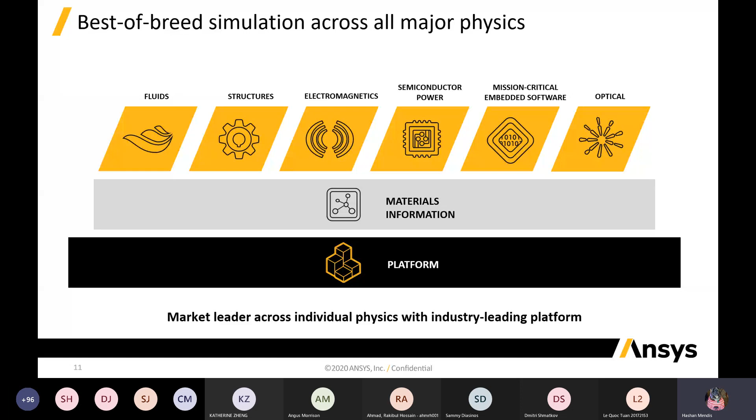One of the reasons we've partnered with Ansys is because of the breadth of what they've actually got. So they've got a full platform based on materials information, fluid structures, and electromagnetics as well. There's a lot to do with Ansys. We even do things like optical. We're not going to go into that much detail in this particular training, but if it is something that you're really interested in, please do let us know. Like if you've got a project, I can always get you in touch with the people that can really help you out, or we can actually get in touch with the Ansys team directly and get them to help you out.

So what are we really trying to do here as well? Now, as well as a platform, but as well as your kind of career as an engineer, at university, you've probably started off learning and understanding about single physics. So you guys have probably got CFD or FEA classes. What happens is that if you choose to go down this route, you will start to learn a little bit more. You'll start to combine the physics together. We can have tightly coupled or loosely coupled simulations, so multi-physics or multiple physics simulations.

What happens is that when we've got these components, we've got designs out there, and we're using these simulations, we've got CAD information as well. They start to form what's called this digital prototype. When we've actually got the full product made, we've got what's called a complete digital prototype. And what happens is that when it's actually out there on the field, we've got what's called a digital twin.

So we can actually start to take information from what's out there in the field, pair it back to the analysis and what we expect to happen, and get a deeper understanding about the actual product, what's happening with it at the moment, is it within the design capabilities, and what do we need to do going forward? Are there potential warranty problems, or can we make aftermarket accessories for it?

So the training we've got over the next couple of days - this first week is going to be focused on fluids, next week is going to be focused on FEA, and the week afterwards is going to be focused on electromagnetics. We've got 2-hour sessions broken out throughout the day. So what we'll try to do is go over the presentations as well as actually get some hands-on with the software. And then we've got some online training material as well.

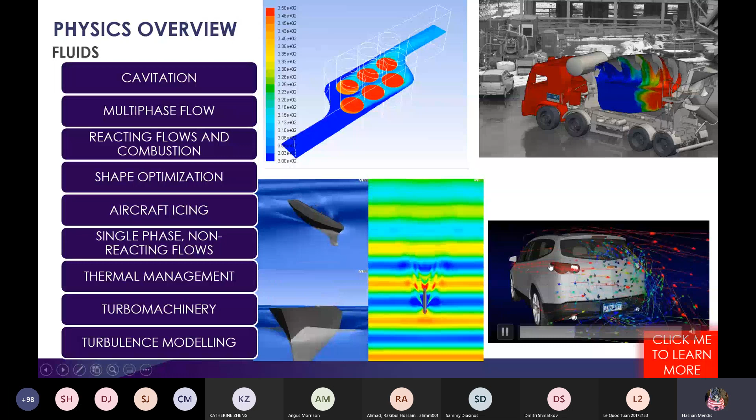On the bottom left, we've got water - so this is a volume of fluid. Again, we can analyze things like boats, and traditionally people are aware of external aerodynamics. So you can see on the bottom right, again, we've got a car, right?

We'll talk about in a little bit more detail some of the structural physics and the overview as well, right? So how it's used - if we've got explosions, if we've got crashes, you can see making these types of components and demolishing them again and again can obviously be very costly. So we can use simulation to really reduce the actual design impact.

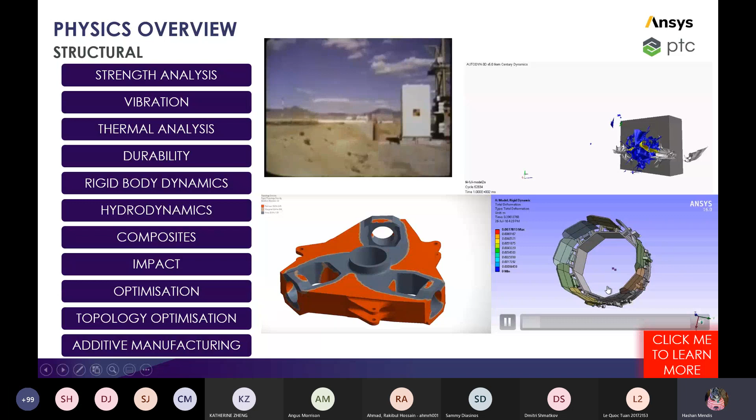Topology optimization and rigid body dynamics as well - again, all of these things are simulations that we can do within Ansys. And we've also got a suite of electromagnetic tools. I'm not going to go too deep into that, it's not really my expertise, but if you do have any questions or you want to incorporate some electromagnetics into your structures or your fluid simulations, have a chat with us afterwards.

Like we're talking about, we learn a lot about the simple single physics side of things, but when we start to get a little bit more advanced, we can actually start to pull a lot of these things together. So you can see this is a bit of a step-by-step about what we might want to do. This is a fluid-structural analysis.

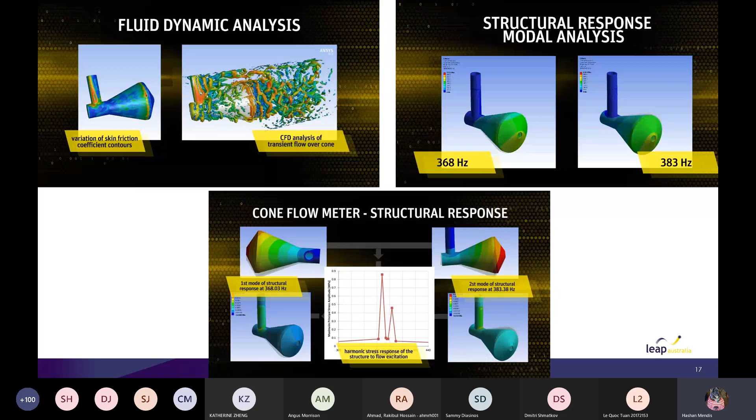So initially we've got some sort of fluids analysis, and it's giving us information about what's happening with the actual pressure on the surface. We can take those forces and do a structural analysis afterwards, right? Whether that's stress strain - in this particular case we're actually looking at the modes. We can then start to understand if there are any resonant frequencies, and have a look at what the potential stresses of the actual simulation might be.

We can start to ask ourselves, how long will this actually come into play? How long will this live? Are there any hotspots? And if we identify any of those, we can then start to make some changes as well with the actual design.

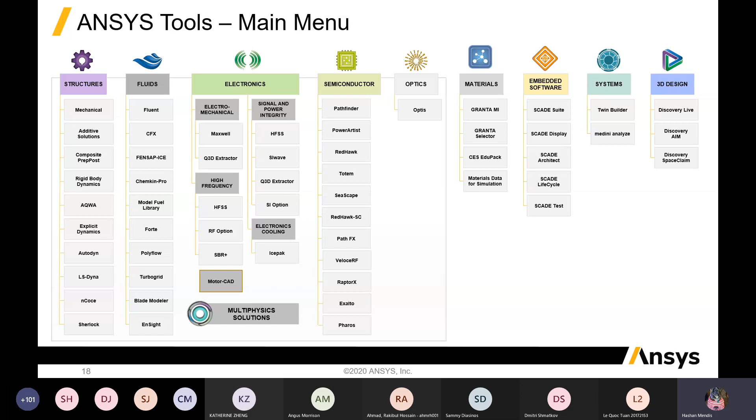All right, so again, there's a huge amount of tools that we've got underneath our actual belt, depending on what you want to do - it can get pretty intimidating. So we always encourage students to come talk to us early on in the design process, have a conversation with us. And if this is something that's part of your project, we can make sure you've got the correct material, you're on the right path, and the actual expectations are managed about what you can do in an appropriate amount of time with the resources that you've got.

Now, we've got a lot of resources to help out students. So we've got technical support. You can actually email us and we'll be able to help you out. Just give us a quick description, tell us a little bit about what's happening.

We've got YouTube channels as well. We've got a bunch of playlists on things like CFD for FSAE teams, FEA, information about AIM and Discovery Live, a bunch of different things. I personally find that's the greatest way for me to learn. Everyone's always a little bit different.

We've also got blogs as well. We've got a CFD blog, a bunch of posts and information out there. Some of these, by the way, things like turbulence modeling, I always go back to because sometimes I forget the difference between the different turbulence models that are out there and the various options. So having some of these bookmarked can be really good for your career, knowing you've got some resources you can go back to.

It could even be things like articles as well. If you're relatively new, maybe your university doesn't have these types of electives, or you haven't quite got to that yet, Ansys have their own learning forums. You can go through and learn a bunch of courses that'll help you out, giving you the backbone and physics behind it before doing the actual tutorials.

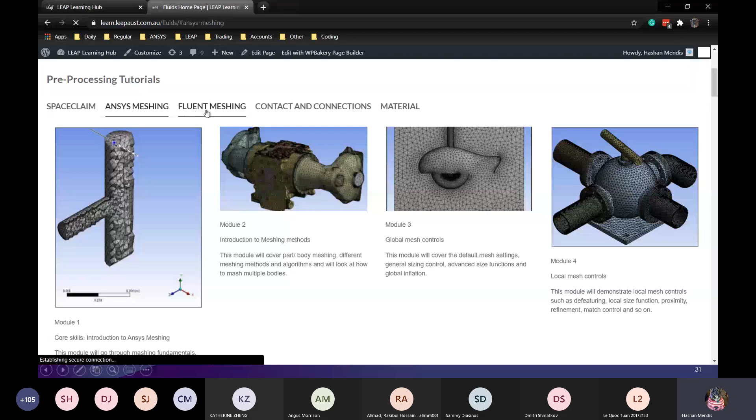So these are the SpaceClaim ones. We've also got things like Ansys or Fluent meshing, and if you're mechanical, we've got some materials and contact selection as well. If we scroll down a little bit, you'll start to see that we've got a lot of the different physics as well.

So if you've got a project where you need to look at multi-phase flow, it's best to have a look at these modules. They're not just tutorials, they're also lectures to give you a good understanding of the actual physics. And there's some optimization too. At the very bottom, we've actually got some getting started tutorials.

So we'll be using the fluids getting started, and we'll be using some of these modules. You can see it takes us through what we're going to be doing over the next week: a bit of geometry, a bit of meshing help, and then we're going to be getting into the physics. Some post-processing, we'll look at some best practices, turbulence modeling, heat transfer, and transient flow as well.

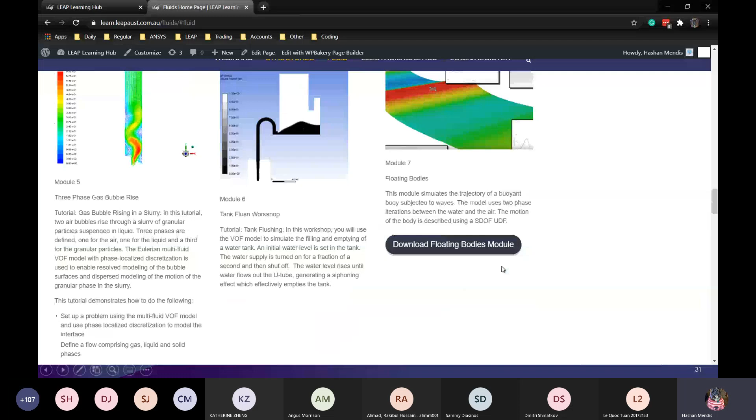And then afterwards, if you're interested in multi-phase, it's always good to do the getting started first, and then pop over to the actual multi-phase section and go through some of these materials depending on what your project is.

And then the other thing is the Ansys help. This is pretty much the help manual for Ansys. I use this on a daily basis. If I forget some of the theory or the user guide, or what's the best way to actually apply a specific model, I have a look at the help guide.

If you go to your start menu, you'll find Ansys Help 2020 R2 or whatever version you've got, and you'll be able to find the Fluent help and go through some of the material. A lot of what we're going to be talking about you can find in this material, and we actually get a lot of our material from the help guide as well.

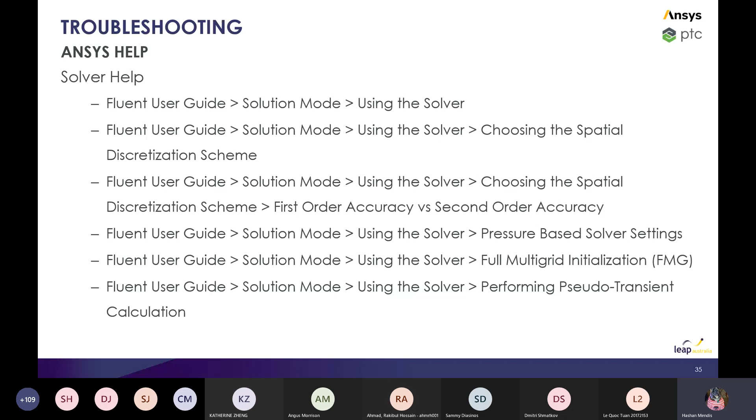Things like boundary conditions, turbulence modeling, you can find your way through to setting up different models and various things. I've found these personally very helpful, and I've got a lot of them saved as bookmarks, because you're not meant to memorize every single thing, but you should understand how to get to that information, including some advanced stuff as well.

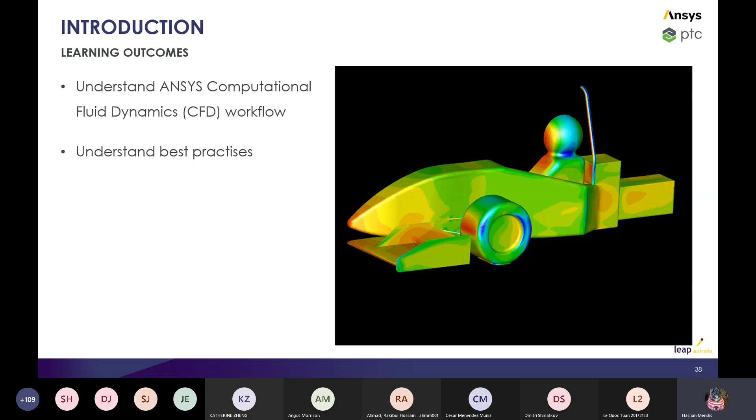If you've got supervisors as well and they want you to do some fluids work for your project, reach out to us with your supervisor and we can get on a call, a Teams call like this, and really help everyone out.

So when it comes to the actual equations, what are we fundamentally doing? We're solving some sort of fluid flow, right, while staying within the realms of physics. So we're solving the conservation of mass, energy, and Newton's second law.

The purpose of what we're trying to do is get a detailed analysis of the actual situation. Things like what the distribution of pressure is, velocity, if we've got multiple phases, like carbon monoxide in the air, what's the distribution of the phases. We can then start to understand a little bit more and get some analytical numbers about things like force, what's the lift and drag on these certain components, what's the ppm in my actual air volume.

It's used to predict the fluid flow. We've got heat and mass transfer, chemical reactions, and other related phenomena, and we can start to pair it together with other physics depending on what we're trying to do.

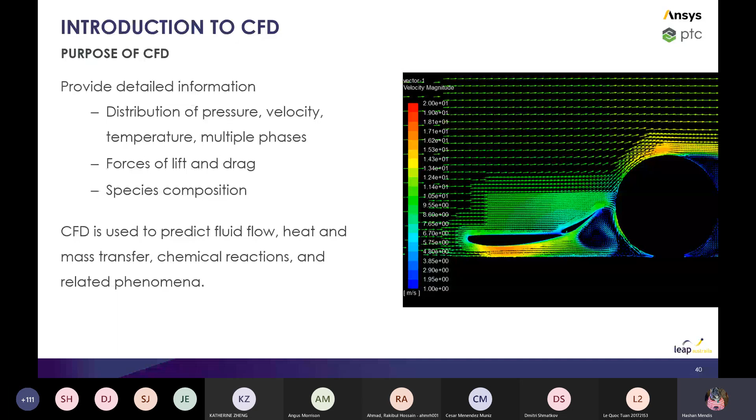It's used throughout the engineering process. I'm sure a lot of engineers at university have used it initially in the conceptual design phase, trying to understand what's happening there. But we use it after we've got a product, for detailed product development. We've got consultants that use it for troubleshooting.

So people often come to them and say, hey, this thing has failed. Can you use simulation to figure out what are the conditions that had to have happened or occurred for this thing to fail, and then make some recommendations about what we can do to really improve it. And then again, through there, we can optimize the actual design and redesign our components as well.

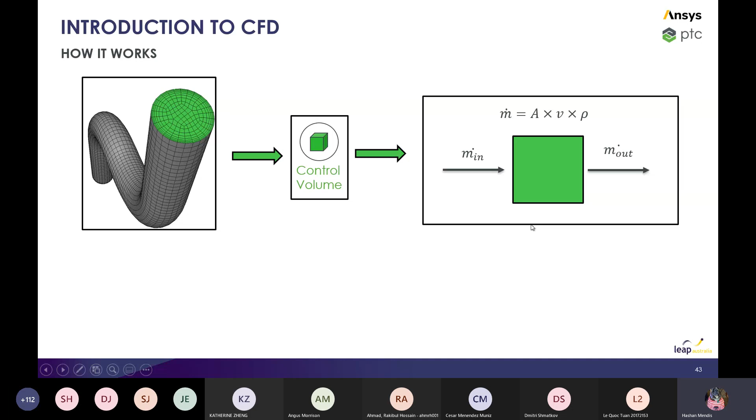This is what we try to do. We'll get a little bit deep into the mathematics. Fundamentally, if we take a step back, we've got some sort of geometry on the left-hand side. We're going to break it up into some control volumes, and then we're going to do some mathematics, making sure things like the mass flow in is equal to the mass flow out. Now, in reality, we're using what's called a Navier-Stokes equation.

So the equation can get pretty complicated, but it can be broken down into these types of terms. We've got some sort of transient term on the left-hand side, trying to capture the unsteady nature of the flow. We've got a convective term here capturing the bulk fluid motion of the actual flow. We've got a diffusive term here capturing the viscous flow, things like buoyancy effects. And on the right-hand side, we've got a generation term or a sink, so if we're creating or removing materials, we can use this term.

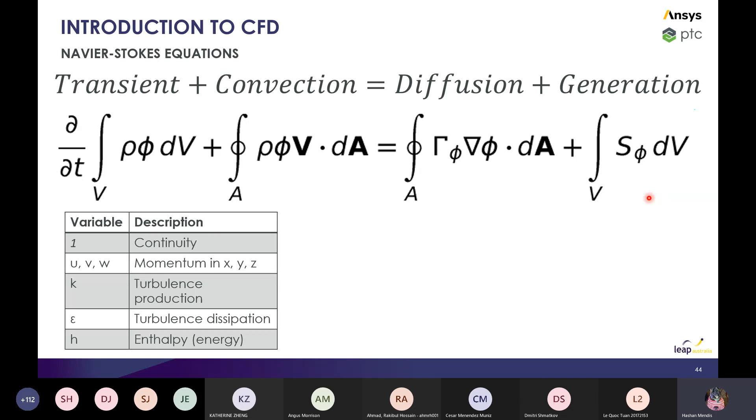What we're doing with this equation is that we can then start to substitute different variables depending on what actual flow physics we're trying to involve. And we can actually add equations as well, again depending on what our actual situation is.

Just walking through the modeling process, we often go around in cycles when it comes to this. We've got some sort of problem identification, so maybe your manager, your team leader, is giving you a problem. We need more downforce, right?

We then go through and try to pre-process our model, so we set it up for the solution, and we've got a couple of things that we can do there. We then start to solve it, and then have a look at our actual post-processing, so have a look at the pictures, the numbers, how does it relate back to our problem.

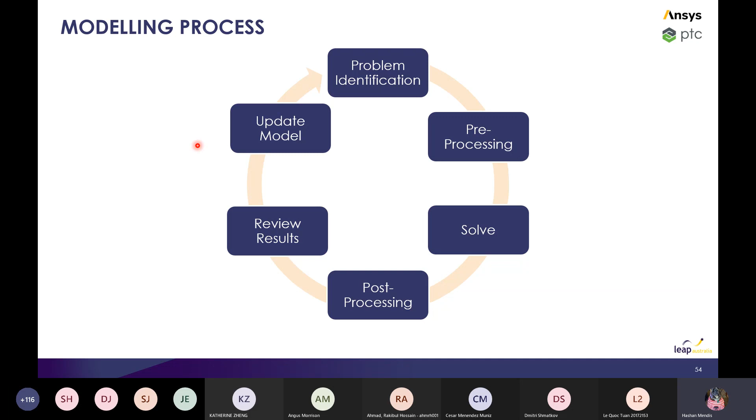And what are we trying to solve? We then start to review the results, and depending on that, we might then go back and update the actual model. Again, thinking back, are we solving the problem? Do we need to make some changes?

It's really important, especially with CFD, before you actually start to even open the software, to have a solid understanding about the actual project timeline. How long do you actually have to run your design and do CFD? How long do you have to actually learn about what you're trying to do as well? What's the current literature? What have people already done?

We don't want to be reinventing the wheel here. We want to be thinking about your constraints, right? So if I'm designing the front wing in this particular car, I know I've got the rules, and the rules say I have to be within XYZ dimensions, right?

Also thinking about what's your system constraints. What are you trying to do? You might be responsible for the front wing, but you'll realize straight away that the front wing affects things like your cooling and your rear wing as well. So then really understanding what's happening there.

How are you actually going to manufacture it? Last thing you want to do is make this awesome component that makes a huge amount of downforce, only to realize that you can't actually manufacture that. And you also want to be thinking about your testing constraints as well.

So CFD doesn't get rid of testing at all. It simply complements it. So at the end of the day, after we've run through these whole steps, we want to actually test to make sure what we've assumed and what we've kind of designed is what we actually see, on car, on track, or on our component.

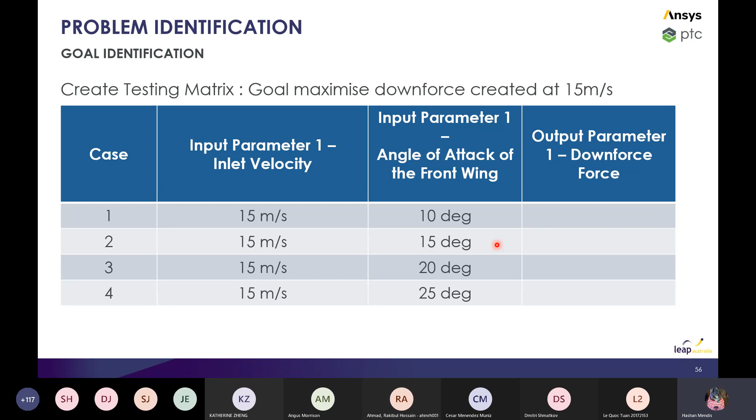So look, when it comes to geometry modeling, we'll talk a little bit about this, and then we'll actually open up the software and start to play around with it. The first question that we kind of need to ask ourselves is what geometry is actually relevant, right?

Do we have existing CAD? Is it manufacturing CAD? Do I need to get rid of and defeature components? Or do I need to create something new altogether, right? If I've got the interaction between the front wing and the wheel, what components do I need?

In this particular case as well, if the air is just going straight on, do I necessarily need the full car, right? I can almost chop half of it and then start to only focus on one half of the actual design. And then again, fully featured, right?

So if I'm focusing on the front wing, and the front wing and the wheel interaction is very important, but I may not necessarily need the side pod, the rear wing and the rear wheels as well. Right. So thinking about, how can I simplify my model and my geometry as much as I can?

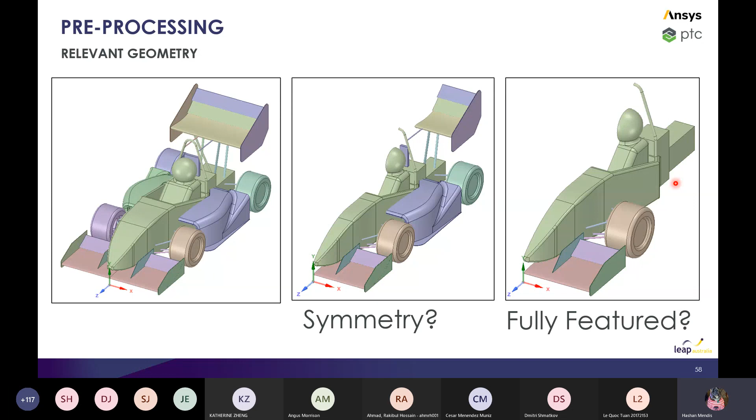By simplifying the process, it means we can also get more mesh elements in there. We can run more designs. At some point, you're going to need to understand what the interaction is between, say, the front wing and the cooling system. So then, only afterwards, say, would you start to introduce them and put some of them back in as well.

The next thing, we're going to be using SpaceClaim to actually prepare the geometry. So we've got some tools in here to remove things like missing faces, small faces, split edges, and extra edges. All of these things that we're trying to do is with the goal of creating a nice, clean geometry to create a high quality mesh.

It enables us to run our simulations with a lot more accuracy. And we won't have any problems as well. So we won't have any bad quality elements, again, which can influence the actual accuracy of the model. We've got some tools in here to start to remove faces and models, check for things like interference and small edges as well.

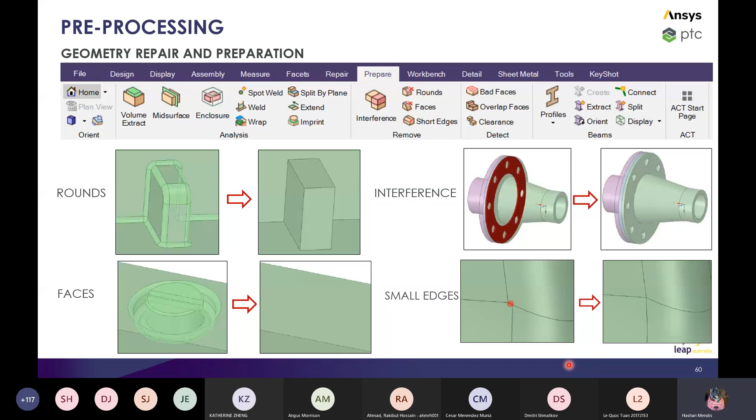If we've got an internal geometry, instead we can actually use things like a volume extraction to extract the fluid domain. So we want to always be looking in the fluid domain, and we've got a couple things we can do there as well.

If it's the external volume, we can look at extracting the external domain depending on what we're after. We've got an example of a car, and we'll have a look through that a little bit later on.

A couple of things for external flow you want to be considering: if we've got a wall very close to the actual geometry, that can affect the flow features locally, right? So if we've got a wall very close to something, we've got local accelerations. One of the things you want to be thinking about is how far away do I need my inlets, my outlets, and my walls from the actual geometry.

You might want to start with a study like this where you've got L, which is the characteristic length of the car. We've got one length for the inlet, height, and width, and 3 for the outlet. Then you might need to do a study, increasing the actual domain to understand how large this needs to be.

If you look at some of the SAE papers and some wind tunnel results, I think they recommend something like a blockage ratio of 1 to 5%. So again, you might want to do some research to understand what applications for that specific industry might already be out there, and what the norms are.

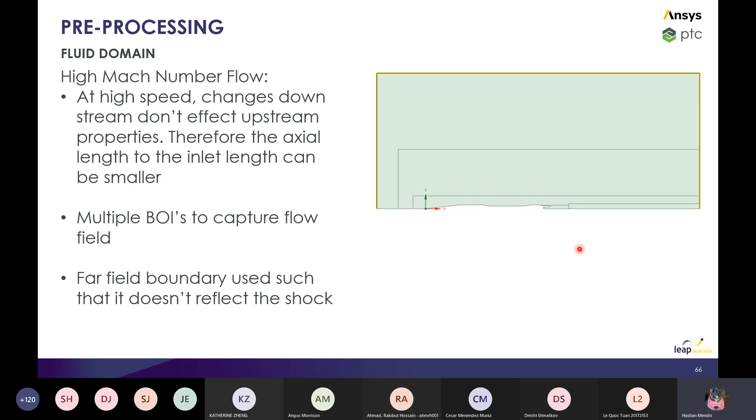Some of the things we might need to do is go in and make some geometry changes, which we'll talk about a little bit later on. We've got some bodies of influence we can use as well, and we've got some key points here. I'll allow people to go over them at their own pace, but we can go through some of that stuff.

Right, so what we'll do is just fire up the geometry. While I'm doing that, does anyone have any questions?

I think you should be able to unmute yourself, maybe you can ask a question. I don't have your email, could you please type it somewhere in a message? Directly to Dmitri, please. Can you see the chat at all, Dmitri? No? Okay, what you can probably do is a Google search for Leap Australia, find the webpage, and you should be able to find the support email address. If you have any technical questions, pop it on there and it'll come to one of our support engineers who'll help you out. We try to get back to clients within half an hour to an hour, so we can get back to you with any questions you might have.

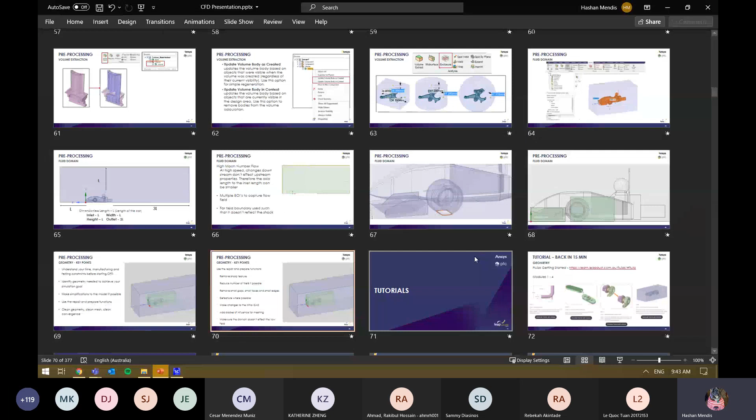All right. Okay, so I'll just try to have that on the right. Cool, all right, so.

I've got Ansys SpaceClaim fired up here. What I did, I just went to the start menu. I normally just type in SpaceClaim, and I've got multiple versions here, but I just typed in SpaceClaim 2020 R2.

The latest version out is 2021 R1, which came out a couple of weeks ago. If you have a look at the Ansys student version, you'll probably see that pop up in a couple of weeks. In this particular case, I've got a couple of geometries I'll talk through, and I've just dragged one in, and it pops up with what we've got.

Just a quick once over. What we've got is like a traditional ribbon style system, so we've got a couple of different things we can look at: sketching tools, designing tools for pushing and pulling components, assembly tools, and measuring.

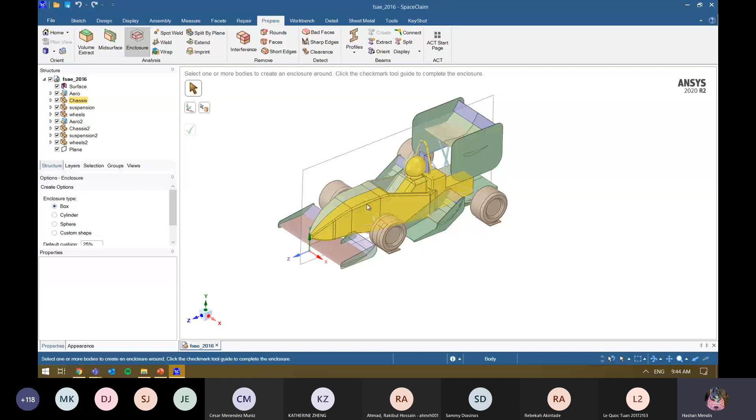Predominantly what I use is a lot of the repair features, for repairing the actual model. Again, using the prepare tools to create things like enclosures, and then we can export them out to Workbench to work on things like Fluent or Ansys meshing, depending on what we're trying to do. There are also additional features for things like sheet metals, and some KeyShot plugins and other plugins you can install if you want to create nice high quality renders.

On the left-hand side we've got our structure tree. You'll notice we don't have a traditional feature tree where you can track the sketch and parameters like that. There are a couple of ways to do it using block scripting, but we'll look at that a little bit later on.

On the structure tree we've got components. I've named one chassis, and inside there I've got bodies and surfaces; you'll notice the components look a little different in the icons. I also use things like selections, which we'll use a little later. It's a really powerful tool because we can look at a specific thing, find some holes, and search all of the bodies, or look within a specific volume.

We've also got things like groups, for creating named selections, which are really important for setting up your simulation later on. I've just brought this geometry in, but you can bring Space Claim, CATIA, or any files into here and work on them, or create geometry from scratch as well.

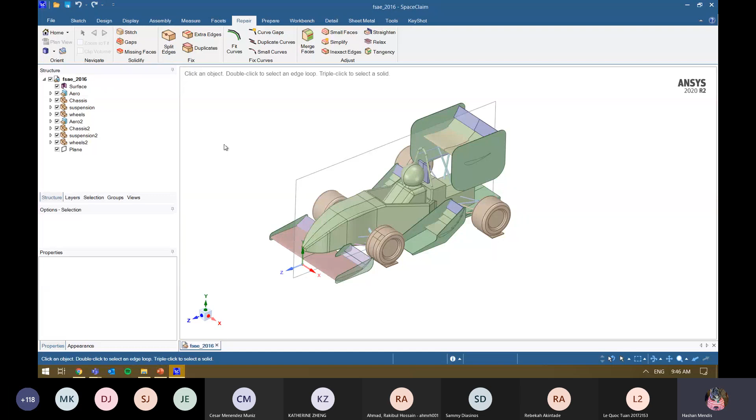What I'll do in this particular case is try to set up a type of simulation and go through it. First, let's look at this model: a lot of what we've got down the middle, if we want to set it up as a symmetric model, we may not necessarily need it.

So one of the things I can do is using my left click, I can select all of them, right click, and suppress for physics. What you notice on the left-hand side is that the icons actually change as well, you'll notice there's an icon on top of all of that. And what we can do is go right-click, hide everything that's suppressed.

What you can see at the top here, from the top views, you've noticed we've got this component that's way out there. We've actually got a surface that's attached onto it as well.

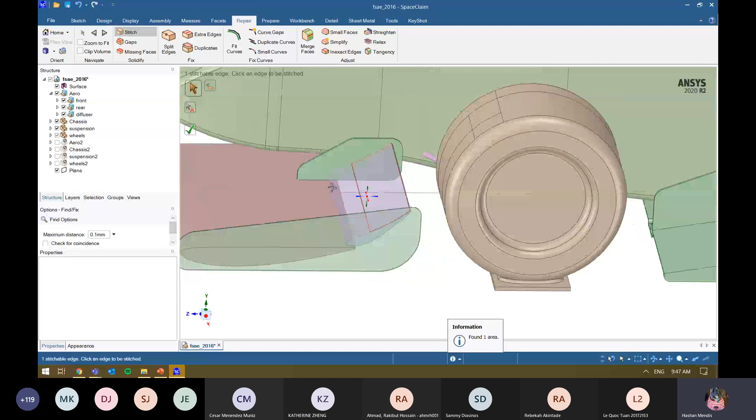What we can do beforehand is we might go through some of these tools, right? So we've got a stitch tool. You can see here, this surface, even though it's come in, it hasn't actually been stitched together. So if we hit the stitch button, you'll notice it then gets converted from transparent to a solid geometry.

We can do exactly the same if we have gaps and missing faces as well. So again, we'll notice we've got a missing face up there. We can fill that in.

Split edges, so you'll notice again, we've got a bunch of these edges here. If I hover over it, these edges don't really improve the features or anything like that. But if we've got edges that are very small together, sometimes the mesher will put edges, elements between there, which can cause some problems. So we can use that to get rid of them altogether.

Extra edges as well. Again, you'll notice we've got quite a bit of extra edges. We can select them individually to get rid of them, right. Again, we can select all these. And there are some other times right around here where we might want to leave them all together, so we can exclude these regions.

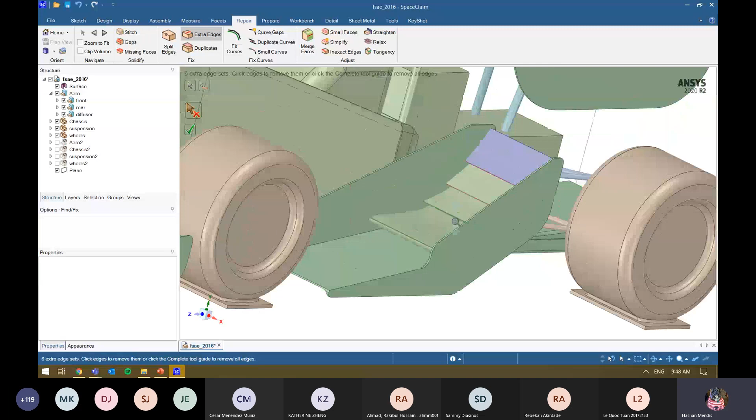And the reason for that in this particular case is that sometimes having an edge that goes all the way across clearly defines what the actual leading edge is of our elements. So again, we can select all that, hit the tick button. We've excluded all these regions and everything else has been kind of fixed up.

The next thing that we'll go, again, we don't really have too many curves or anything like that. Small faces is really important. You'll see on the left-hand side, sometimes what happens is that we can get very small faces that cause problems.

So what I'll try to do sometimes is actually increase the size until I know what my smallest face is or what my smallest edge is. Having all these small elements, all these small faces can cause problems with meshing. It just requires a lot of mesh elements, and we may not necessarily need to refine this region. So getting rid of that can be very helpful.

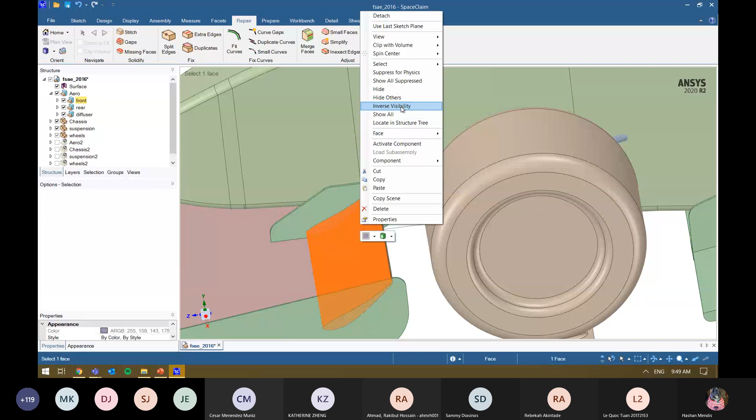Very helpful, again, if you're not the one that's actually created all this CAD. In this particular case, I'm just going to hide everything else. Because I've created this CAD, I've gone in and tried to make sure things like the minimum element size is roughly around 3 mil.

So when I start to add some sizing, I know exactly how large I need to have my elements or how small I need to have them.

Again, we've got some things like simplify, so we can simplify quite a bit of these features. I'll leave that for now. Inexact edges, and again, I'll normally go through the process and fix all of these up. There are some times where it doesn't quite get fixed up.

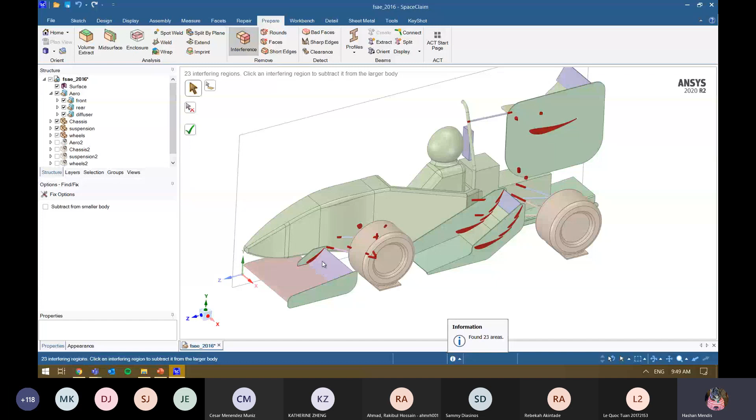Right, so you can see here, there's quite a big bulge here, and you can start to make some changes. You can either go back to the CAD or use SpaceClaim as well. If I pick up things like the interference tool, we've got interference between some of these components. It may be something that we expect or not as well.

What I'm also trying to find is a duplicates tool. There you go. So I've also picked up this surface here, and I can click to get rid of it as well. Sometimes, by the way, if you're exporting out to something like an STL or a step file, or IGES is sometimes the worst. IGES sometimes will get rid of faces and things like that, and you can get duplicate faces. So that's why you might need to go through the process of actually cleaning some of these materials up.

What I can do as well is, so I've got my aerodynamic components. Again, I don't really need this rear wing or the diffuser.

So I can select both of them, and we can just suppress both of those as well. Again, hide what we've got, and we'll leave the remaining components here.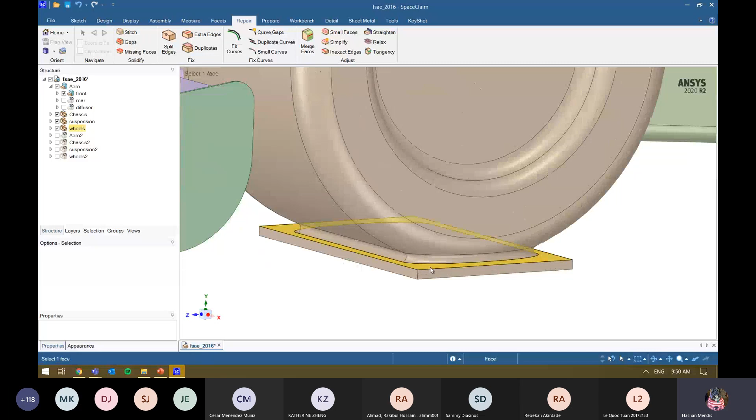You'll notice what I've done here with the wheels is that I've created it on a platform as well. We'll talk a little bit about that in a second. And okay, we've got some faces here as well.

So what we can do is we can select the wheel, right? Or we can, again, select it over here. You'll notice at the bottom right, I've got an indication of how many bodies I've selected. If we hover over to the design tab, I can use this move feature, and I can actually move it into place, roughly to exactly what I want.

I can actually take the tool here, and I can move it up, so I've got some small components here. I can move it up to a specific body if I wanted to as well, right?

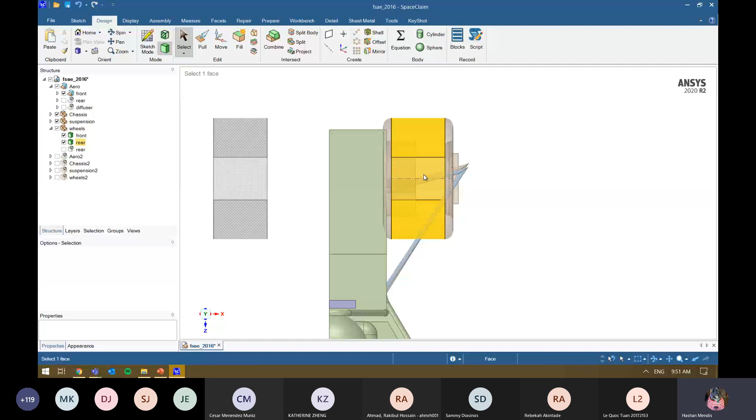What I might want to do to make it a little bit easier, I can make something like this transparent. Again, take my component here and move it over to wherever I need to be.

You'll notice, by the way, the reason all these things on the left-hand side is that I've created mirror images, right? So I've maintained a mirror component. So you'll notice if I show all the wheels and all the other components, now the actual wheels are back into where they should be.

Okay. So now that we've got our geometry set up, one of the things I'd like to do is create my enclosure. So I've got this enclosure tool over here. I can select everything, and I can manually specify what my correct distances might be.

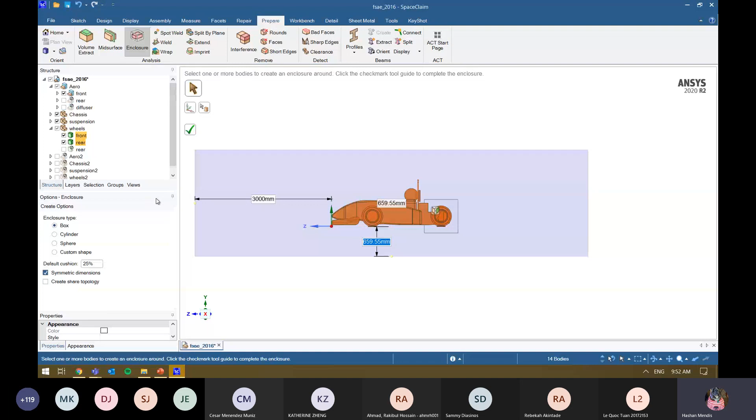Or on the left-hand side, you can see I've got different enclosure types. I can even give it a default cushion as well, so everything's roughly 25%, right.

Now, what I want to do, I need to kind of cut the bottom off. I might want to bring the outside out a little bit, and I can create what's called bodies of influence, which we'll talk a little bit more about in the meshing side of things as well.

So I will select both of these axes, hover over to the design tab and create a plane. And I can use my split bodies function here to split that body using that plane. I can get rid of that bottom plane altogether.

And then zooming in, you'll notice what I've kind of done over here as well. So if I hide this component, I've got a small radius around, so zoom back out. I've got a small radius around where the tire actually makes contact with the road. If we have sharp angles, it can cause problems for us in the meshing process.

So often what I try to do is make sure with some of these sharp contact edges, there's a small fillet around there. And again, I'll take, say, these two faces there. I'll create a plane. If I wanted to, by the way, I can take that plane, use the move tool, and I could move it up to a specific face, right?

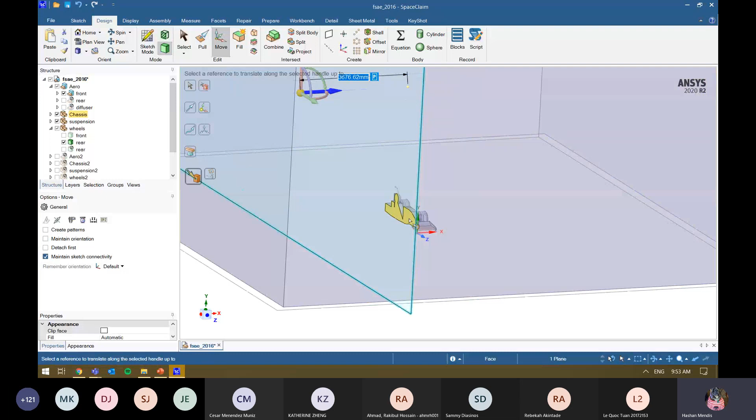Again, use my split body function to get rid of the component on the left-hand side. So let's say, again, I wanted to extend this body out.

I can use what's called the pull tool over here. So I can select the pull function and I can manually pull it out, right? So I can specify how many millimeters or meters I'd like to bring it out, or using some of these tools again, I could create something like a ruler and tag it on that Y and make sure I've got a certain distance from the top there as well.

When I'm looking to do a fluids analysis, in this particular case, because I'm just interested in the external aerodynamics, I don't actually need any of my solid components there at all. So I can actually go in now and go back and suppress all those components. And if I hide everything, you'll notice I've just got my enclosure, right?

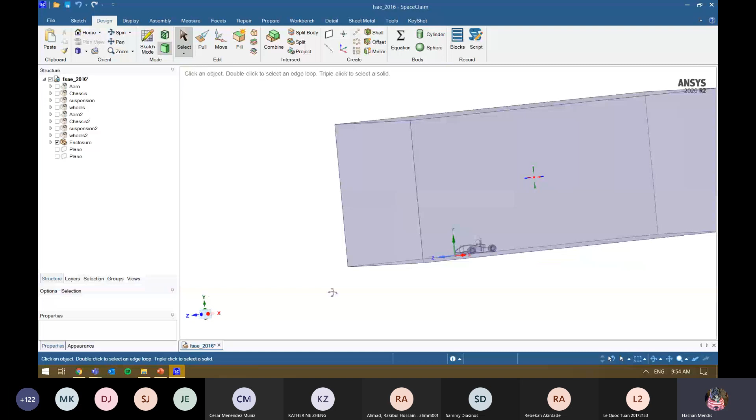So a couple of things that I normally like to do, you can select something like this and go into section mode as well, right? And you can use your tool to go in and kind of inspect. And I often like to go in and just, again, double check. On the right-hand side is where I've got my solid, my fluid domain, and I've got a void there so I don't have anything through there as well.

The next thing I need to do is set up boundary conditions, and I'll do that in SpaceClaim. I'll make sure all the names are exactly what I expect. So I can select that component and create a named selection, and I'll go through the process of giving it some names.

For this type of analysis, I've got inlet, outlet, and the top two here, which are walls. I've got the bottom here, which is the ground. The reason I'm calling it something different is that the boundary condition in this case is different - I actually want a moving wall. And at the top here, I'll call it symmetry.

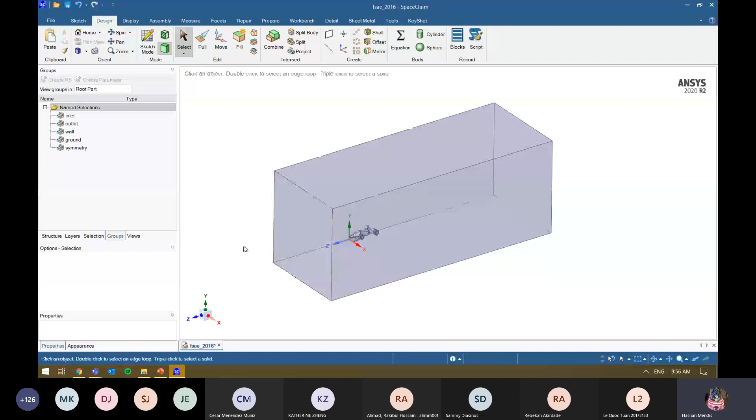What I often like to do after creating some of these named selections is select them, right click, and hide the actual face. Then I can go in and start making more changes around here. So I can lift myself up using the triad.

I can select the wheel and make a named selection for the front wheel. I won't bore you, but I'll go through that process for anything I might be particularly interested in, so I'd make it for the front wheel and the rear wheel. The reason is I know I need to give this a rotating wheel, rotating wall component.

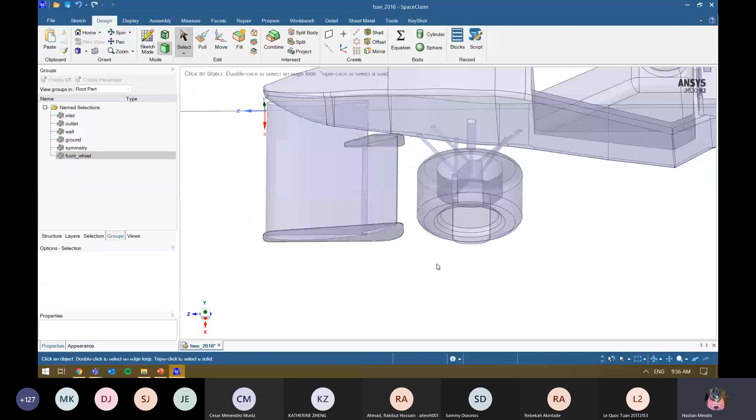I'll make it for the front wing as well, because I know I need to pick up the forces on the front wing. You can create a separate name selection for the end plates if you wanted to, and you could also pick up things like the chassis and suspension. So after you've got those name selections, we can bring it into the actual mesher and set up a quick analysis.

Right, so this is an external flow example. I've also got a couple of different ones here that I'll go through. This one is the turbocharger, right? So I'll just drag this up to the top.

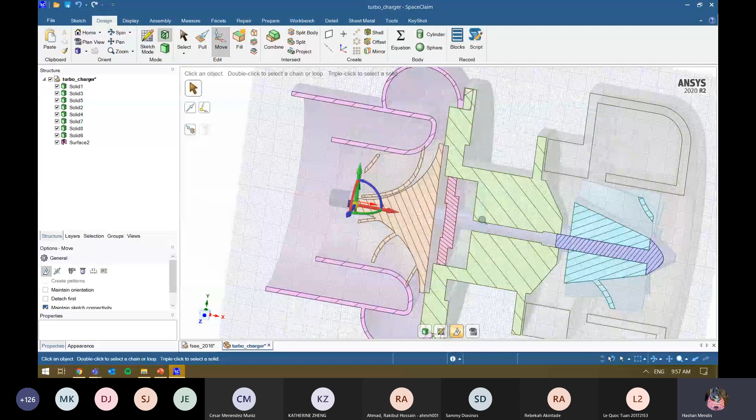We've got a couple of different things happening and I want to set up the geometry here. With something like this, one of the first things I like to do is go in, select this section view over here, and use the move grid to get an understanding of what's happening. We've got a couple of models, some things that are offset, and it's not exactly what we want, so we're definitely going to need to make some changes.

You'll notice on the left-hand side everything is just solids, and we've got a surface over here as well, so we probably want to have a look at this surface too. One of the things I'll note - I'll just make an example - so I'll hide the others.

Having these geometries here, when they're just in a component, out in the bare, not in their own component, what can sometimes happen, especially if they're touching, is if I make a design change using the pull function, it may automatically merge these faces together, which is not what I want. You can see here I've got two components, solid 1 and solid 2, and if I make a small change it will automatically merge together. There are ways using SpaceClaim to use the no merge feature, but often what I like to do is...

I like to select the components, right click, and move each to a new component. Now that they're each their own component, they're not going to merge when I try to move things around. So just a couple of quirks when it comes to using the software.

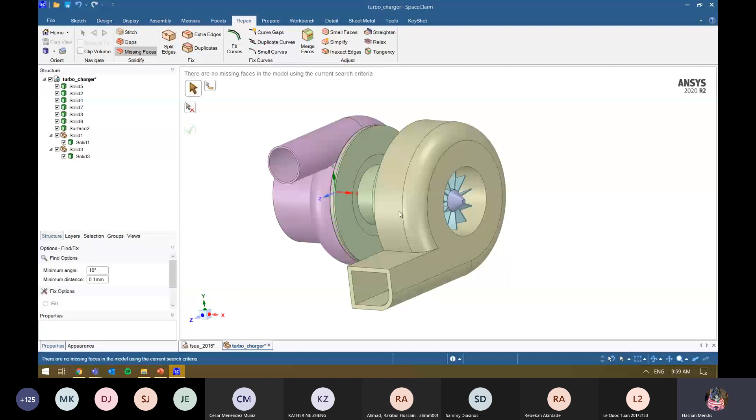What I might want to do is go over to my repair tab. Again, I've got gaps, nothing there, missing faces. You can see it's identified a missing face at the bottom. I can select it and you'll notice straight away it converts from a surface to an actual solid.

Using my section mode, I'm going to select the Z axis, and I want to align a couple of these components together. So in the assembly tab I've got an align tool. What I can do is pull this out first - I can left click on one and it will move all of it across. You'll notice even though I'm in section mode, the whole geometry has moved across. So I can do exactly the same over here and move this in.

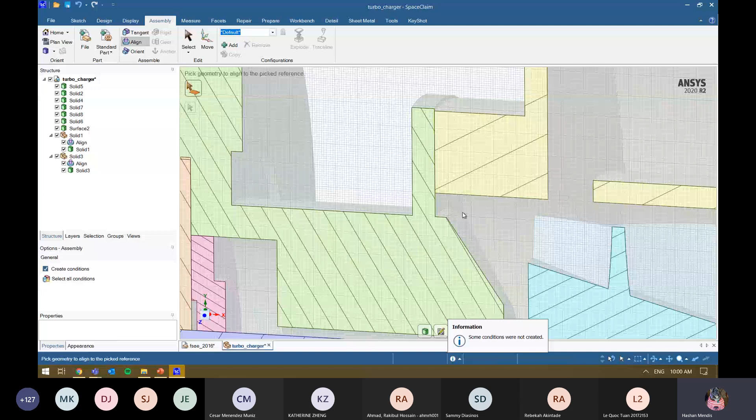And on the right as well, so I can move that in. And you'll notice on the right-hand side, again, this needs to be moved in as well. So you can go in and start to make some of those changes and bring all of these components together.

Let's say I wanted to extract some geometry, maybe pull up the internal flow on the left-hand side. I can go over to my volume extract tool. You can see I've got a bunch of different options, and hovering over any of them gives me an explanation, same at the top and the bottom.

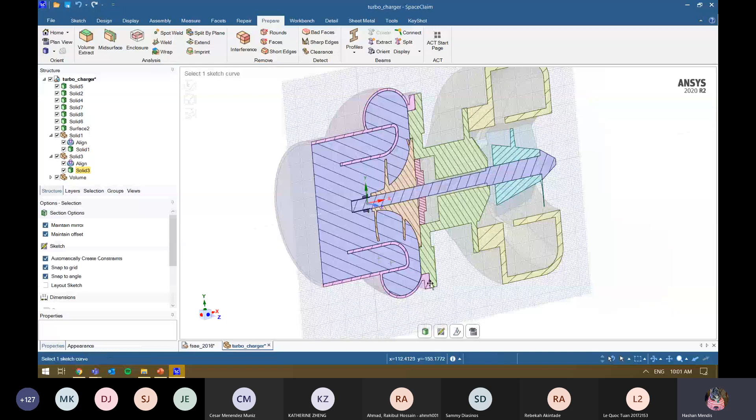In this particular case, I need to pick up what the capping regions are, and I need to select a seed face. If I move over, I can see I need to specify what my seed face actually is, so I'll click that, using my section view - X on my keyboard, by the way, as a shortcut.

You'll notice it's extracted the fluid. We've got that body over there, and we've got solid bodies as well still inside there. So it's extracted that fluid first for me.

Another thing we can do, similar to before, if we wanted to look at the external flow in this particular case, we can use things like an enclosure to create around there as well if we wanted to.

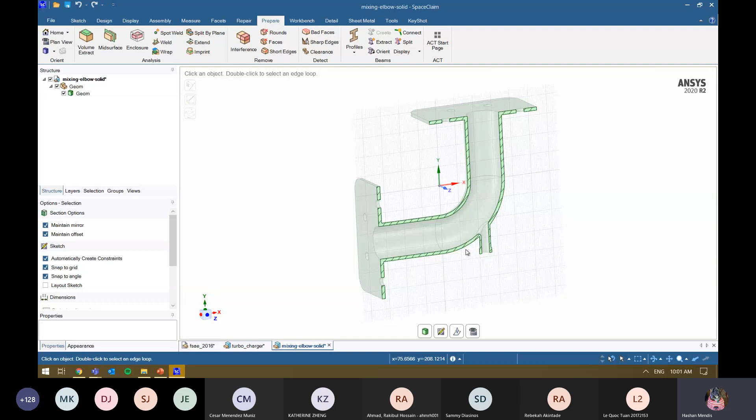What I might do is create this solid elbow - I'll do a quick one of this, we'll just extract the fluid. What we'll do in this particular case is bring it into fluent meshing to open it up and play around with it. Then we'll create a mesh and bring it over to the fluent solver, just to give you guys an understanding about why we want to set up boundary conditions or name selections that are appropriate.

So what we'll do is go into prepare, we want to volume extract. We want to pick face, that one, and the bottom as well. Then we want to pick our seed face and select inside.

In this particular case, I don't want to do a conjugate heat transfer or anything like that, so I will suppress the outside body. And we've got our geometry there.

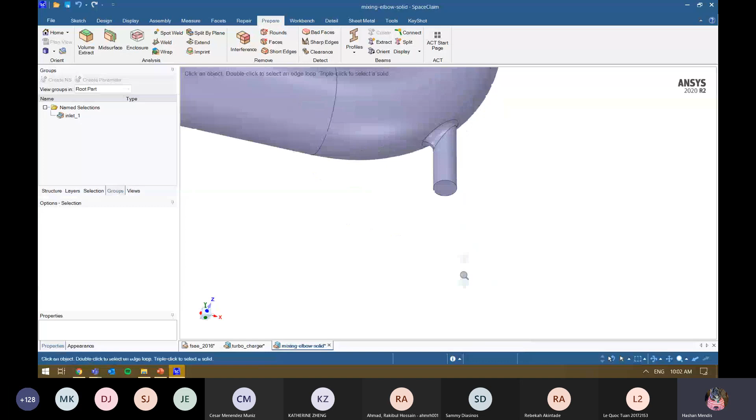On the left-hand side, I'm going to create a name selection, I'll call this inlet 1. There are a lot of shortcuts inside SpaceClaim - if I hover over a specific component, you can see it says Control G, and it allows me to very quickly create something.

And if you go to the files, by the way, there is a way you can specify your own shortcuts as well. I'll select everything else - double clicking just selects all my other surfaces - and I'm just going to create that into a wall.

Cool, so what I'll do is just transfer it over to Workbench. Actually, we'll start off with probably some Ansys meshing, and then go into try it for Fluent as well.

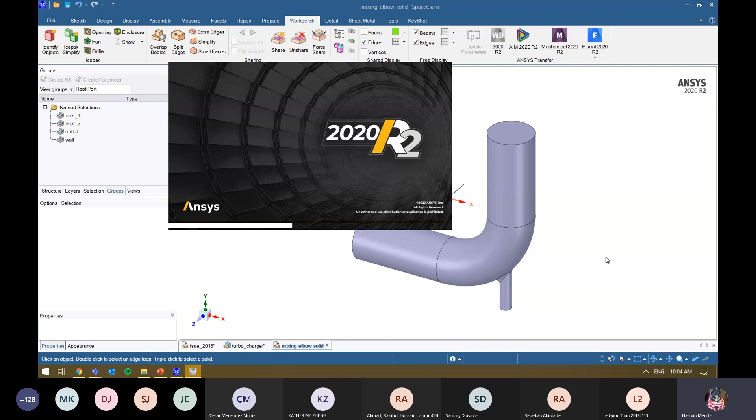We'll set that out, and it'll open up Ansys Workbench for me. Ansys Workbench, by the way, we use that in order to actually build our actual simulations - it's a platform we can use to create the steps that we require, and we can start to pull in different physics as well.

You'll notice on the left-hand side we've got a lot of toolboxes, depending on the analysis we're looking for. So we've got a Fluent toolbox here, we can drag it over to the geometry, and it'll share the actual geometry. We'll set up the mesh in Ansys Meshing, then hover over to the setup and go through the solution process.

You'll notice on the left-hand side we've also got additional things, like static structural simulations and thermal simulations, and we can use Workbench to set up multi-physics simulations as well. So you can see when I hover over it, I can transfer over the geometry as well as the results from my fluids analysis and apply a structural analysis.

For now, I'll just delete that. All right, just save this off.

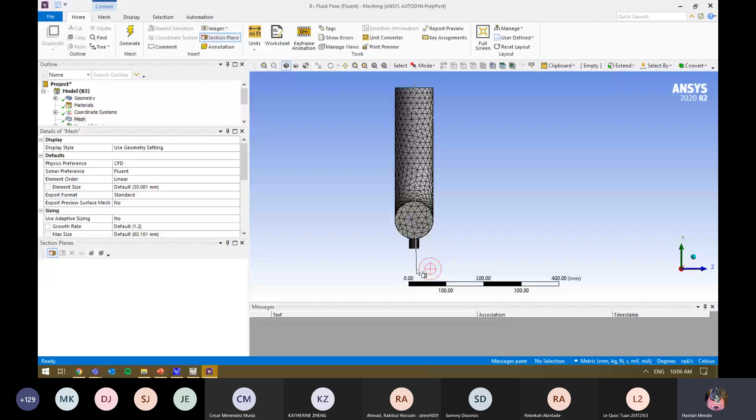If we go over to the selections, what am I looking for? The section plane - we can take a cut through the middle, and you can see the mesh that's been generated. You'll notice there's a lot more refinement around this area because we've got a smaller inlet, and more radius again around these regions. We can use these sizing features on the left-hand side to refine that as well.

What we'll do is also add inflation. Inflation is specifying boundary layer elements, used to accurately predict what the actual boundary layer is doing. You can see here the way it does that is by creating these prism elements. We'll talk a little more about that in the meshing, and Errol will go through some of that process in his sessions as well.

After we've done with that, we'll just right click and update the actual mesh. And we'll go over to the setup - we'll use the double precision solver.

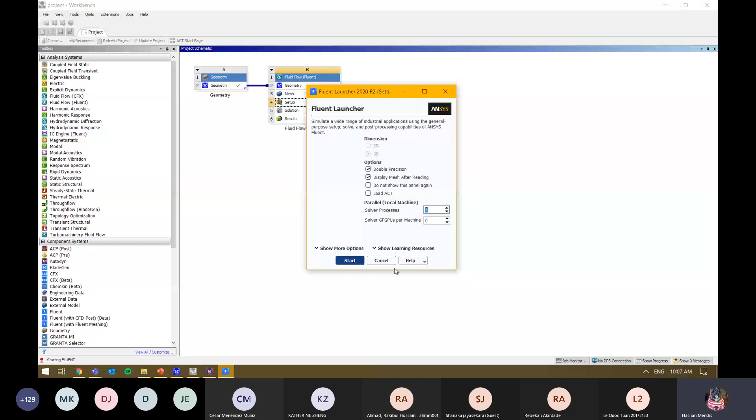In this particular machine, I've got 4 CPUs. You'll notice, by the way, if you need to, you can check out some of those Ansys resources on the left-hand side if you're having any problems. And at the bottom here, you've got the help, with quick access to some of the help menu and help options as well.

And we'll fire up Fluent. Apologies, guys, we've got a couple of problems here, so I'll just close it down and open it back up again.

Let's reset that, save button again. And I'll open this setup again. Hopefully this one works - if not, we'll open it just a different way.

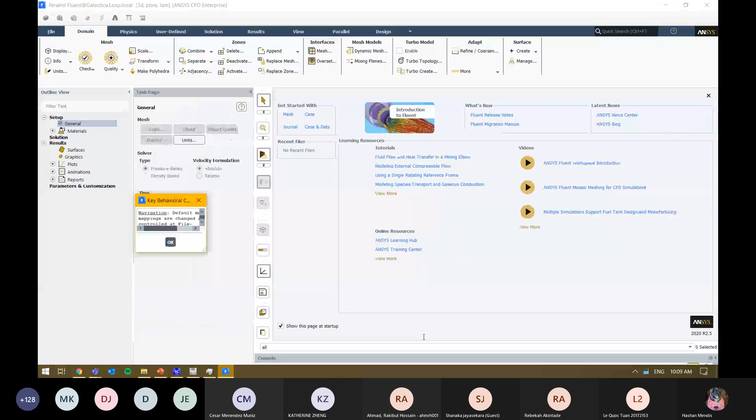Awesome, all right. So I'm just going to set it to default, and I'll bring up the console as well. The console, by the way, just writes out exactly what I'm doing. So this is Ansys Fluent.

Again, similar, we've got a ribbon style where we can go through the process and steps to set up our simulation, and on the left-hand side we've also got an outline view. I'll step through the outline view just because that's what I like to do, it makes sense to me, but the training will show you both ways to go about it.

So what we'll do is, on the models, we'll notice that the K-Omega SST turbulence model has been set by default. Again, Errol will go over the different turbulence models and some of the other models that are actually available.

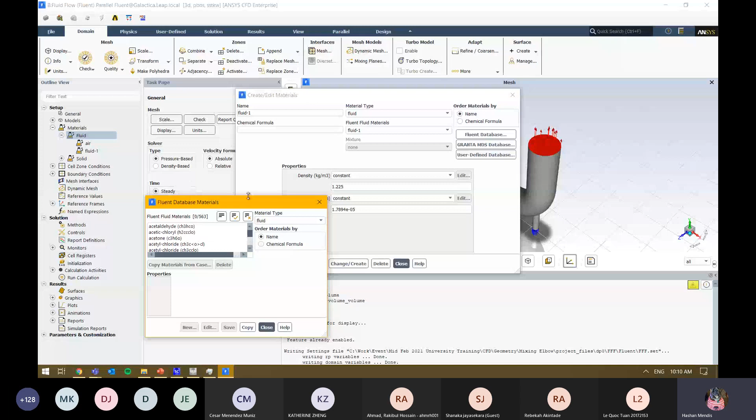On the fluids, we can double-select our materials and inspect the actual properties. I can create a new material if I want and manually put in the components, or if I hop over to the Fluent database, you'll notice we've got a bunch of different materials we can directly import.

On the left-hand side, we've got just a single cell zone and some boundary conditions. This is why it's really important to have appropriate named selections. You'll notice the named selections have come through, and it's automatically identified it as a velocity inlet. If that was incorrect, I can right click on it and actually change the type, and we can see we've got a bunch of different velocities we can implement.

So what we'll do in this particular case is just set up a velocity inlet of 1 for one of them, and we'll increase the velocity for the second one, and we'll leave the pressure as is.

We've got our solution method, so these are some of the discretization methods we were previously talking about. Normally I'd set up some report monitors.

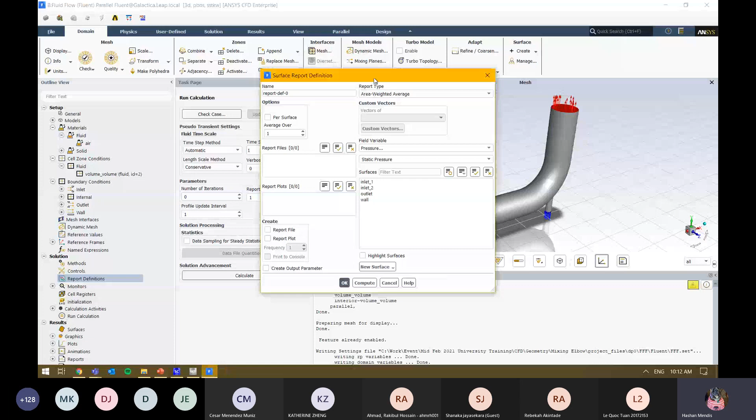We'll set up a surface report of what the area weighted average is, and we'll have a look at the area weighted average of the outlet. We'll look at things like what the average velocity might be, and we can also pick up mass flow rate at the actual outlet.

And we'll create a report out of it and print to console. Go over to the run calculations, we'll give it like 100, and we'll just hit the calculate button.

So what it will do for us is initialize the solution, give it values, and then start to solve. We can visibly see the mass flow rate, so we can see how it's changing with the iterations, and we've got the residuals as well. We can see the residuals are dropping, and the mass flow rate is flatlining, which is exactly what we want to see.

I'll let this go for a little bit. You can see visibly on the console what the actual values are and what's happening.

After the simulation's finished, you might want to have a look at some of the different key values you're interested in to understand if you've got a converged solution. Have a look at things like the residuals. You may even need to do a sensitivity study as well. But what we can do, we'll just show the mesh.

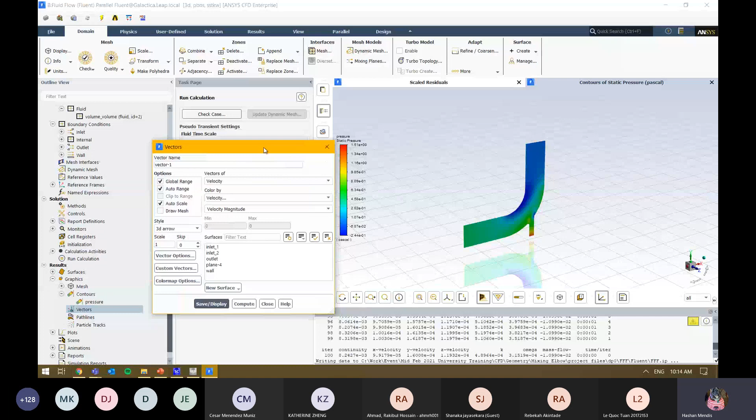We can have a look at things like vectors as well, so if we put vectors on the inlet surfaces and the outlet surfaces as well.

We can also have a look at things like path lines. So we can show what is happening if we release some sort of path lines from each of these inlets over here.

We can color them different ways as well, so let's color these by velocity. And we'll create - I just want to get rid of, we'll just have the walls here.

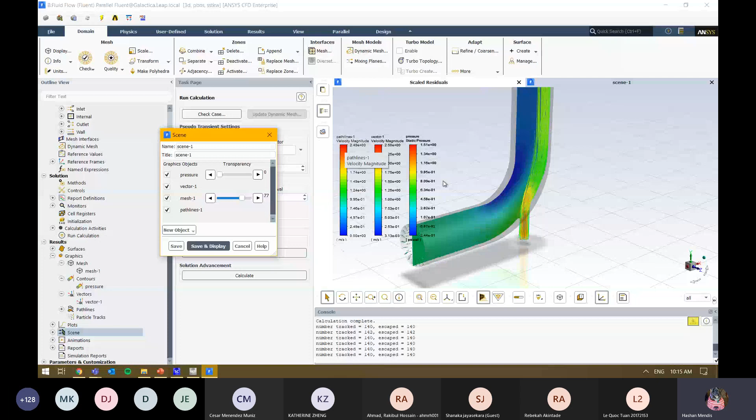What I can do afterwards, if I wanted to take a nice picture, I can select the mesh and all these components, so we just increase the transparency of that. We can start to inspect what's happening in this process and have a look through some of the components as well.

If we look at our reports, we can pick up things like surface integrals, so we can look at what the actual mass flow rate is on the outlet, as well as the other two. We can see what the sum is, and we've got a report of it there as well.

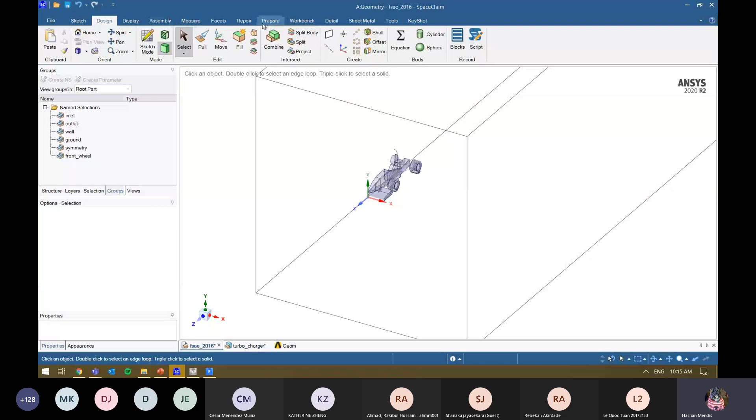So that's just a quick overview of setting up Ansys Fluent, and then going into setting up the geometry in Workbench in SpaceClaim, working through some different components, like an external flow example and an internal flow example, playing through some of the tools, creating things like an inline tool, and also some of the repair and prepare functions. Then bringing it over to Workbench, creating a mesh, and setting up and running a quick simulation. We were able to get through most of that in a couple of hours.

What I might do as well is create a new component. One of the things I wanted to show you, and maybe talk about, is some of the tools we've got inside here. I don't want to spend too much time, but we can use some of the sketching tools as well.

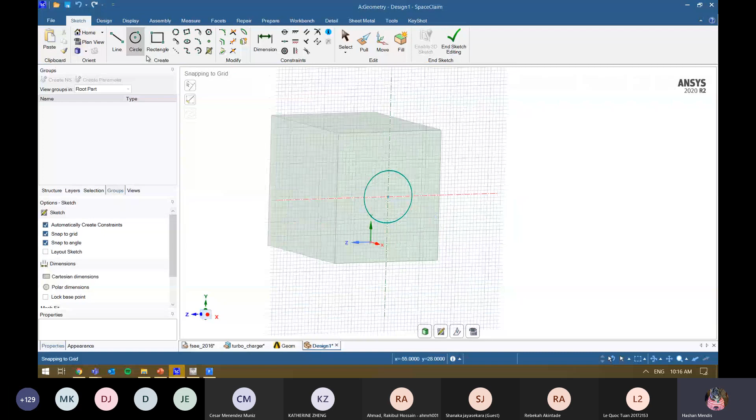So if I select that rectangle, you can go in and start to create something. We can then go over to the design tab, use the pull, and using that sketch function, we can pull it up. Again, if I wanted to, I can select a surface and use my pull in order to actually pull through that surface as well. And we can create these types of components.

The other great thing about using SpaceClaim is that, built off that surface, you can copy and paste the surface, and we've got that already created for us. So I can fill that in using the fill tool, which converts it to a solid. Use things like the move tool to move it across, and use my pull functions to pull them out as well.

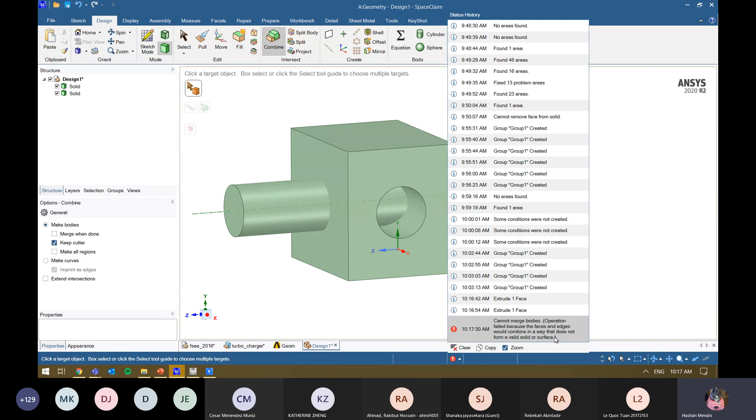If I've got that type of geometry, I can combine it together. So again, select both of these components and combine them. If something's gone wrong, it'll normally give me an explanation about why these things can't be combined.

Or we could use the split body function, so I can split that from that body. Now you'll notice if I hide that, I've got these two additional faces here that I can start to remove as well. What we can do is also use the pull tool to select an edge, and we can create things like rounds.

So we can zoom in, make what we're after, or specify the round. And you can see we've got a couple of additional tools as well, so we can create a chamfer if we wanted to.

We can take that edge and extrude it out in a specific direction, then start to pull down on it, make it exactly what we wanted, and play around with it so we can use some of these features.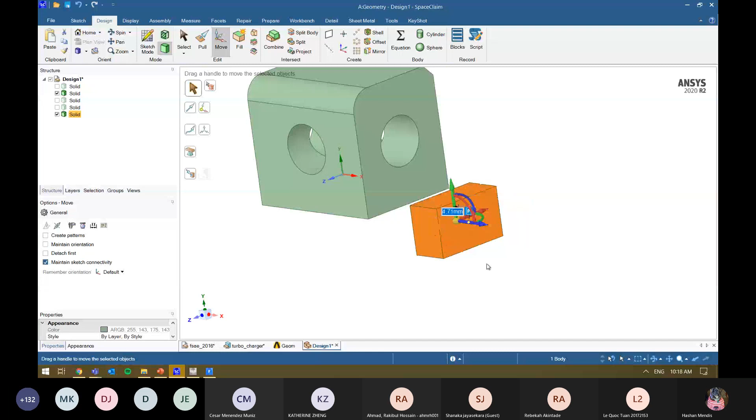We can take that edge over there as well, so again we can copy the edge, and pull it across, and build off the geometry if we wanted to. Depending on what you want to do, you can create this geometry from scratch, or you can import it in. Let's have a look at the block scripting as well.

You'll notice on the left-hand side I don't really have any feature tree, so I can't go back - I'll have to Control Z. But with the block scripting, it actually does start to record some of these features as well.

Let's just say I go over to the top here. I use my sketch function, and I can create a rectangle here, and I'll give it a dimension as well. You'll notice after that sketch is created, I've got a couple of dimensions here.

I can go back to that component, and afterwards I can go in and use my pull feature to cut through that. You'll notice that extrude face has been picked up, and I've got a couple of things I've done here - it's pulled it through at a specific distance. Then if I wanted to, I could go back to this feature and make it 15 mil instead, and it'll regenerate that sketch as well as regenerate that pull feature.

So what you can do, depending on the complexity, is use some of this inherent block scripting in Workbench to script through a bunch of different cases and different meshes as well.

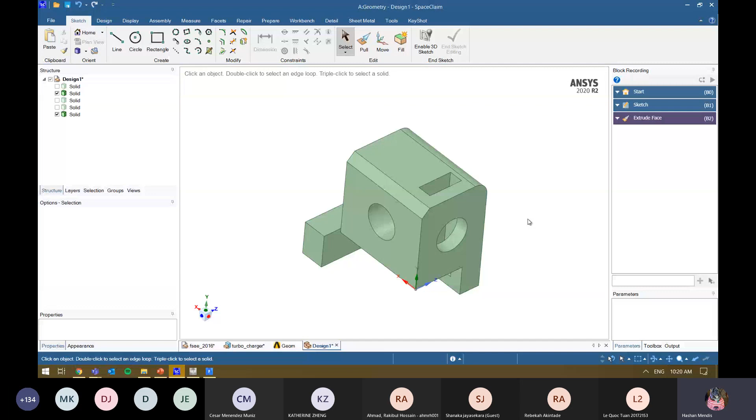Okay, so those were the main things that I wanted to address and go over for the first section. Hopefully everyone's got a good understanding about what you can do with SpaceClaim.

What I'd recommend is that if you've got some time, hop over to the Learning Hub, go to Fluids. There's a Getting Started Fluids section, and if you go to the very bottom it'll take you there. You can download all of the modules and the videos there, and try the first couple. Module 1 talks through some of the core skills using SpaceClaim. Module 2 is about creating geometry. You'll notice repairing geometry, which is what I was playing around with, and some of the external flow features. And if you want to set up parameters, you can also do that in module 5.

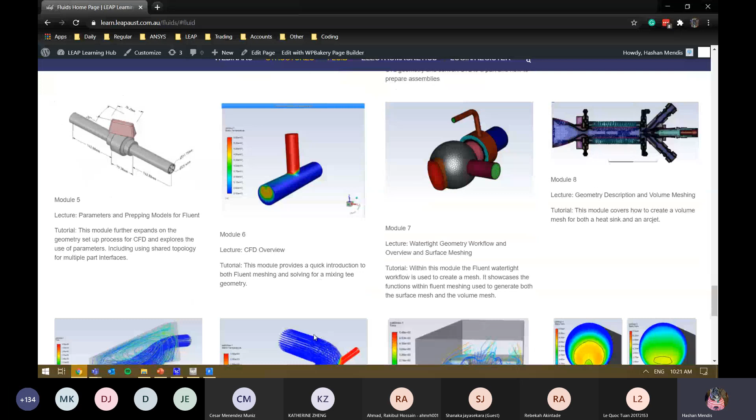There's an overview as well, and we'll go through some of this stuff a little bit later on. So those are the key things I wanted to go over. Hopefully everyone's got a good understanding of the starts of CFD, what we're doing in the background, some of the geometry and pre-processing features we can do within Ansys, and how we might need to clean up our geometry as well.

Tomorrow we'll focus on meshing, and then afterwards we've got Errol coming in to talk a little bit more about the actual solver, some of the numerics and mathematics behind it, as well as the post-processing side of things.

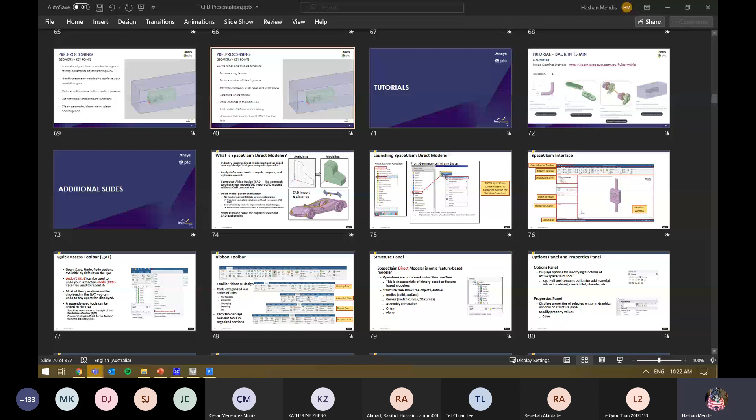The first question was: why SpaceClaim, why not Design Modeler or ICEM CFD? So, I personally use SpaceClaim just because I think it's a more modern and easier way to do all of this. Design Modeler does have its benefits, because there is a feature tree there, it's a little bit closer to the SolidWorks and CATIAs of the world. But personally, it hasn't quite been improved, it doesn't look as nice and as flashy, and SpaceClaim has a couple more features as well. ICEM is just something I personally haven't used too much. But from my understanding, we can't do a lot of geometry prep in ICEM. We generally recommend SpaceClaim just because there are a lot more features and tools, and it's what's going to get updated quite a bit with exactly what we want to get out of it.

Yeah, what I might do... do you want to go to the next one? Sorry, I don't want to leave this. What file formats can be imported? For example, can 3D scans be imported as STL?

Yes, so if we go to open here, we've got a bunch of different file formats. Pretty much anything most people want to do, even Revit files and things like that, can actually come into SpaceClaim. SpaceClaim has its own reader as well, so it will automatically read it in, so you don't necessarily need to export it out into a neutral file format and then bring it back in. STLs come in as well. I think with 3D file formats, the one thing we might want to talk about is point clouds. I don't think we can import point clouds at the moment, but it might be something we can do with some other software here and there.

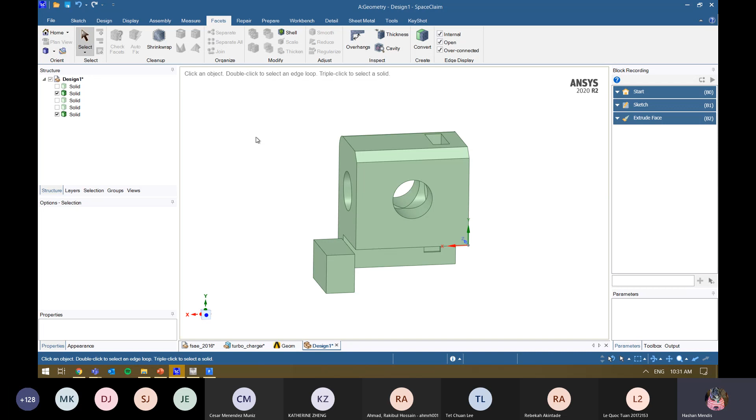If we've just got a block here, we'll just create our component and pull it up. So we've got two ways of doing something like this. If we go over to the Prepare tab, we can select the enclosure and type something like cylinder - just for the purposes of this I'll make it small so it's easy to manage. Let's just assume we've got something in there, maybe it's a blade or something like that, and we want to make it cylindrical, give it some sort of cyclic symmetry.

So what I would normally do is select my two angles, or you can use the mid plane there, and create an actual plane. You can select that plane and then use the move tool. If you hit Control, you can create a duplicate of that.

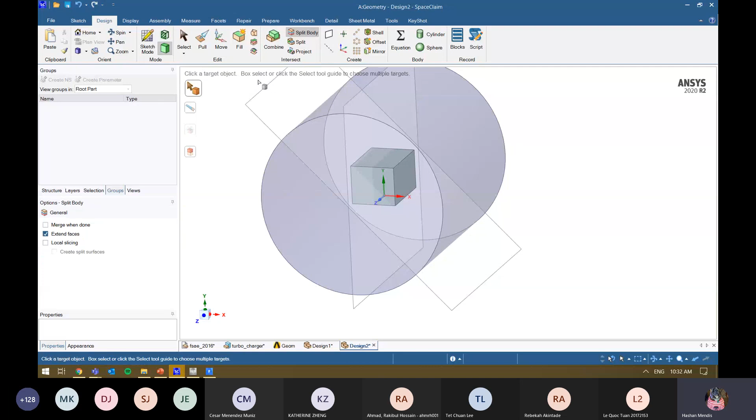Let's just say we've created a duplicate there and we want it coming in at around 45 degrees. We can then use the split body function and get rid of some of these components here. So I've got rid of them, sliced them together, using the one at the top here.

Then we can hide these two, and we can probably hide the solid geometry if that's not something we're particularly interested in as well. And we've got this kind of sector model.

What we do is that we might have, say, some sort of inlet, an outlet, and symmetry at the top. And then for this cyclical side of things, we would give it a named selection: Periodic 1 and then Periodic 2.

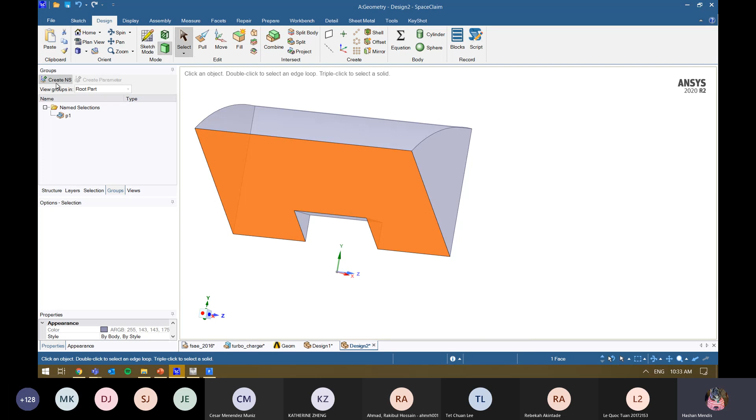In Ansys Fluent, in the actual solver, we could tell the software this is cyclical, and there's an actual boundary condition for that as well. So that's how you pretty much set something like that up.

Depending on what you want to do, though, there might be a couple of things. So if it's like a blade, or you want to do turbo type machinery, there are separate ways you might want to set it up. So it's one of those things, maybe before you go through the process, have a bit of a chat with us to understand exactly what's happening, what you're trying to do, and it might help you out there. Cool.

Awesome. Is there any more questions at all?

I have a question, how to draw a random shape using SpaceClaim. For example, a tree root in a pipe. Sorry, can you say that again? You're a bit faint there. My question is how to draw a random shape using SpaceClaim, for example, a tree root in a pipe. Oh, okay, yeah.

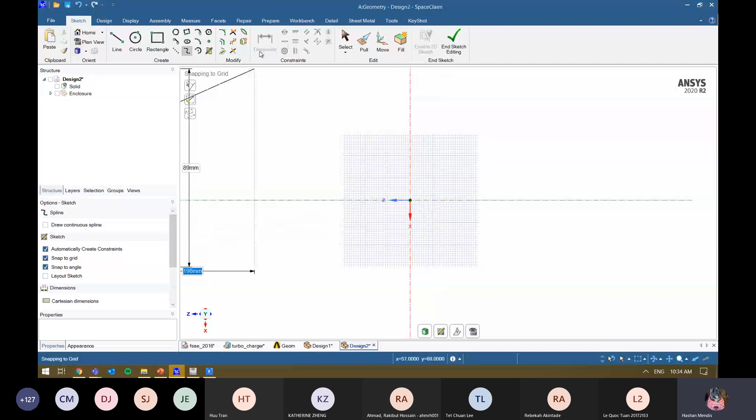I guess there's a couple of ways that you can do something like that. You can use your sketching tools here. We've got splines, so features like splines. Depending on how good you are, you can create your spline like that.

Let's just say we can take that line and pull it up into a surface, and then we can extend that surface and create an enclosure. We can create a solid. We can import geometry in if we wanted to as well.

So if we've got import from other places, or the other way to do it is that you can import what's called a polyline in. A polyline is essentially a text file with a bunch of coordinates for the X, Y, Z, and it can automatically create this spline for you.

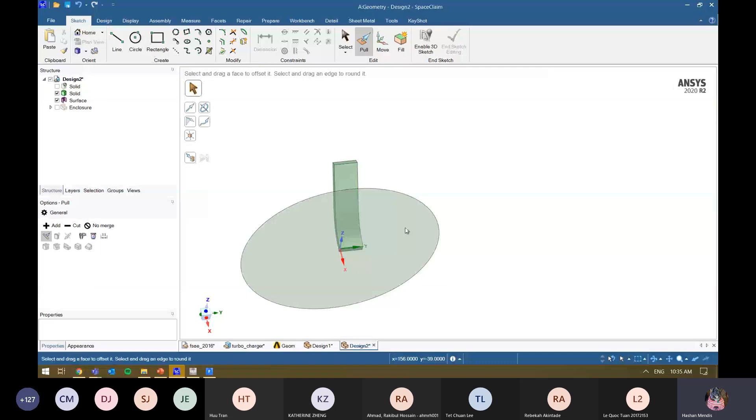So then when we've got something inside there, you can go in and, let's say, you want to remove it from something. So let's create, say, we've got something like this, want to extend it out, and we want to hide it.

We can go back and use our split body tool here. So we can use that, sorry, use a combine tool, and use that as the cutter and get rid of that geometry. You can see it's created two of those. We can delete that. So now if you take a section view through there, you can see the geometry that's been created and how it's been taken out of that actual component.

Yeah, so it would be playing around with the line, rectangle, spline tools here. We've also got a 3-point arc, and you can bring that in.

I've also had, if you've got a PDF as well, you can bring in a PDF. You can resize it to however you want, and then when you've got an actual picture, you can overlay the spline tool or the line tool, or one of the create functions here to actually generate that shape.

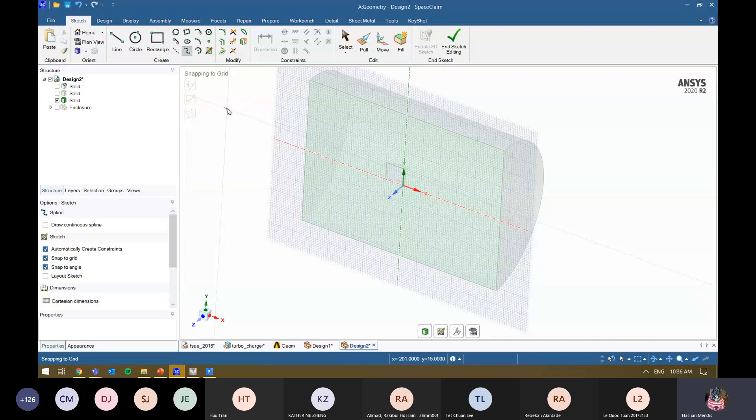Then again, you can either create the line, like I was showing you, extend it out, or you can cap the surfaces and create those components. Thank you. Does that make sense?